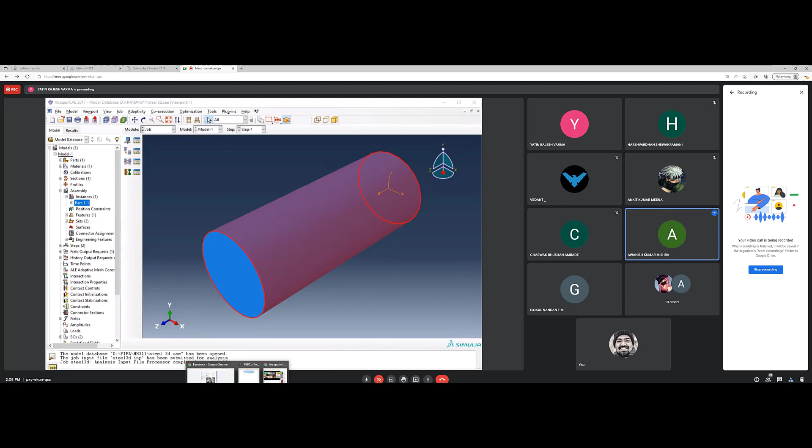यतिन, आई कैनॉट हियर यू. कैन अदर्स हियर हिम? Avnish, are you able to hear Yatin? मुझे अवनीश भी सुनाई नहीं पड़ रहा. So you guys can hear me? I cannot hear you guys. अच्छा, just हाँ, अभी बोलो. अभी आ रही है आवाज़, ठीक है. सो हाँ, मॉनिटर कर लो.

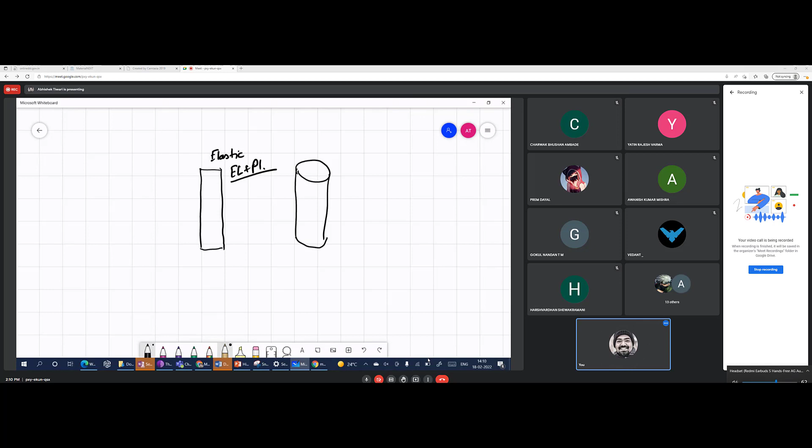But in none of those cases you should have seen that the sample is necking. The sample is not necking, right? It is just getting elongated. In the elastic case, there is a Poisson's ratio. In plastic case, the Poisson's ratio is 0.5, volume is constant. And apart from that, nothing else happens, right? So the question is how can we also simulate the necking part, and why is necking not coming up? Can you tell me why the sample is not necking in our model?

Hello? सुनाई दे रहा है क्वेश्चन? The question is that whatever you have modeled so far, the sample was not necking. Is this correct? तो क्या मिस हो गया जिसकी वजह से नेकिंग नहीं हो पा रहा है?

So if you give values beyond UTS, do you think there will be necking?

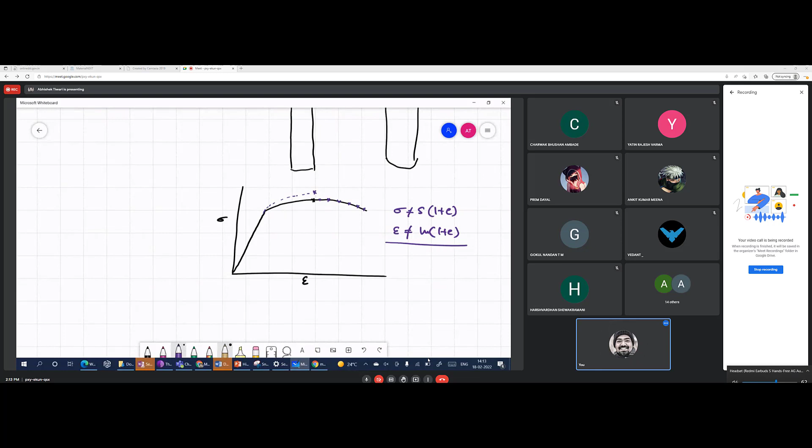And even if you go beyond UTS, first of all, you cannot get points from here. For true stress strain values, you can't use that relationship, right? So sigma is not equal to S into 1 plus E, and strain is not equal to ln of 1 plus E. This will not hold beyond UTS because the volume is not constant. So I hope this part is clear to you guys. So this relationship of true stress strain versus engineering stress strain assumes that the volume is constant. That's how you derive these equations.

Because the volume is not constant beyond this point, you cannot use this correlation, so you can't get the values here. One point you can get, which is at the last point, and that you get from the experiment. Basically your sample breaks into two pieces, so at the end you join those two pieces and measure the final area, then calculate ln A naught by AF, and you get one particular value of true strain there.

Some people apply this formula for the stress value and take that as the last point, so they get only one point, and then they extrapolate the data like this. The point I'm trying to make is that even beyond UTS, this true stress-strain curve is not supposed to go down. It will always go up, right? And as long as it goes up, there is no reason for softening in the sample.

For the model, right, whatever is happening here, a similar kind of thing will keep on happening even beyond UTS, even if you supply the data to the model. So even in that case, there will be no necking. So what we will have to do in order to ensure that the sample also simulates the necking of the experiment.

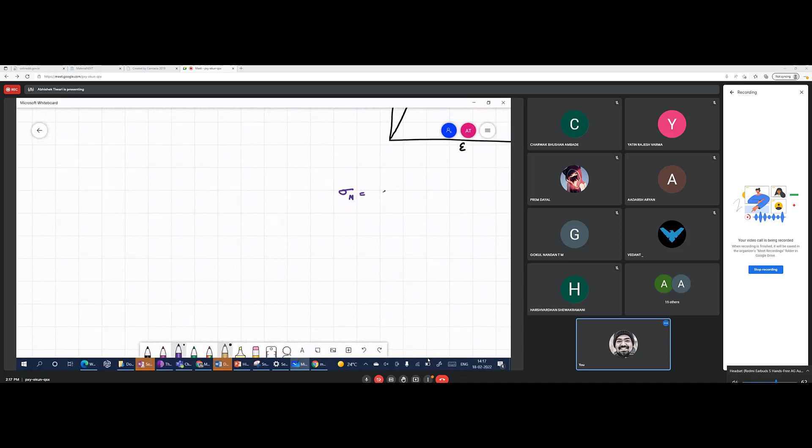Stress at any sharp stress-raising place is equal to stress applied into 1 plus 2a by b, where a and b are the major and minor axes. So in this case, it is an assumed ellipsoid, which is either a notch or a crack.

So here you don't have a stress concentration factor. So why will the stress increase at any place locally? Unless there is a local deformation, necking is not going to happen.

Okay. So anyways, maybe you need to revisit the MM302 discussion. So what happens is that...

Okay Vedant, you have said too many words, and in technical language those words have certain meanings. Can you tell me what is pressure? No, that is stress. Hardness also has the same dimension, load per unit area, but hardness is not stress. So pressure is one component of stress, which is hydrostatic stress, right?

Okay, so that is negative hydrostatic stress. Okay, so the material will flow. Okay, you have made a right point. This is the cylindrical parallel part of the tensile specimen, and when you apply forces so that you are pulling it, the material is flowing, and for a certain period of time it will flow in a uniform fashion, because there is no reason to not flow uniformly unless you have something which is inhomogeneous inside.

So it will elongate following the Poisson's ratio or constant volume condition, right? But it cannot do that forever. So at some point it will become very, very thin, right? And when it becomes very thin, there will be a local anomaly at some point. It can be at the center; it usually is the center for ideal condition because of the constraint. So where the constraint is maximum, the constraint is maximum at the center, right? Because you are pulling from upside and downside, so where the forces balance each other, they balance at the center, right?

And that's why you have to have the anomaly there. So there will be a breaking point where the continuum cannot sustain any holes. At some point of time, the continuum will break. Okay, so there will be a surface creation. Once there is a surface creation, what happens? The stress will change and the strain will change locally. So then you will have those stress concentration factor and all those things.

But that is a very ideal situation. Usually what happens is that if the material is flowing like a ductile material, then you will have some void formation. Okay, so these voids are the points of breaking of continuum. What is a void? Void is something where you don't have a material, right? So continuum is not there.

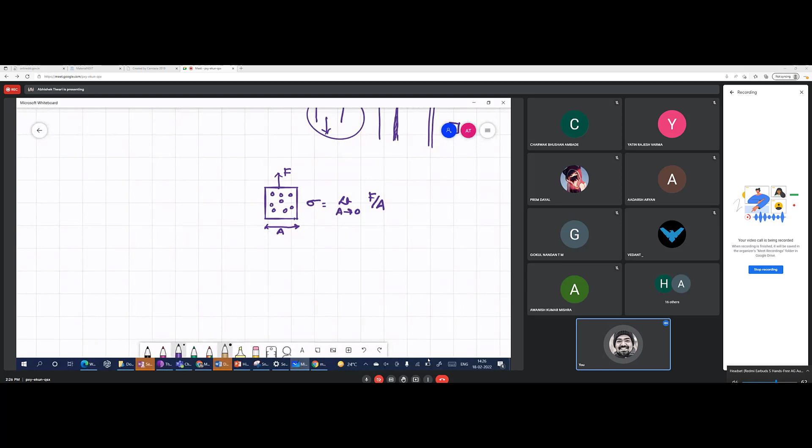One simple idea is that you assume a box, okay, in 2 dimensions, and you are applying certain amount of force, and this has an area, so you have stress is equal to force per unit area. So stress is equal to force per unit area, and so everything is good. What will happen if there are voids in the system? So let us say there are certain number of voids in the system, and they can be of different sizes, they can be of different shapes, we are not bothered about it.

So in that case, if I cut it at one place and then I try to find out what is the stress there on this plane, okay, on the xx dash plane, then that will be force divided by the area of xx dash plane, right? And you can see that this area is not equal to this area, right? Because if we look at this plane closely, then we will be cutting certain number of voids, right?

So the total area A is this, but the real area should only include these parts, right? So this is A dash and this is A. So obviously these two are not the same. Is it making any sense to you?

Okay. So now, as a way of defining this difference in area, I will call that a parameter D, or let us say omega, okay? And I can say that obviously A dash will be a little bit smaller than the initial area by a factor omega. So when omega is 0, A dash xx is equal to A, and whenever omega has a value higher than 0, this will not be true; it will be equal to A into 1 minus omega.

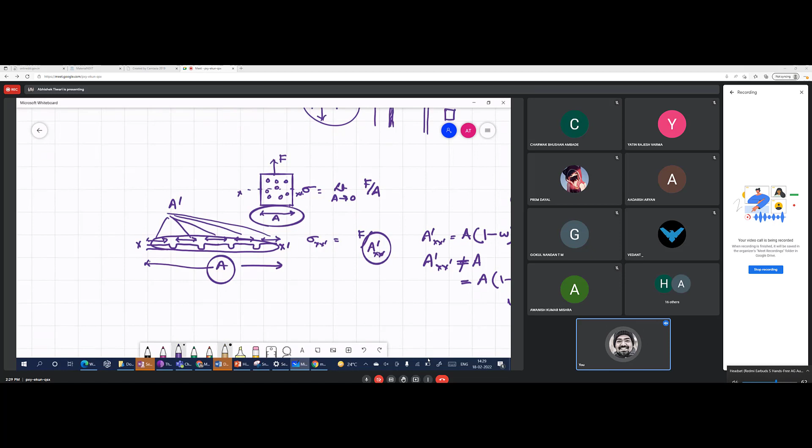And then to what maximum value can it go? Obviously it can go to a value of 1, where the area will become 0. So when omega is equal to 1, A dash xx will be equal to 0, right? But we cannot ever reach that extent. Why? Because before we reach a place where all of the surface is consumed by voids, the material will fail much before that. Do you understand this?

So you have an area where certain voids are there, right? And then with more stress, the number of voids or the size of voids or both will be increasing, right? So as the force increases, the A dash will keep on decreasing because you have more voids and bigger voids, right?

But you cannot go to a point where the whole area is consumed by the grown-up void, or crack if you call it. It will not go to that point because the material will fail much before this condition. Okay. So is it making any sense to you?

Okay, so what we have established is that we have a parameter omega which starts from 0, and ideally it can go to a maximum value of 1; it cannot go beyond 1, right? But in reality it will hardly reach the value of 1. And this defines how much difference in stress I am getting. So there is a change in area and therefore a change in stress, right?

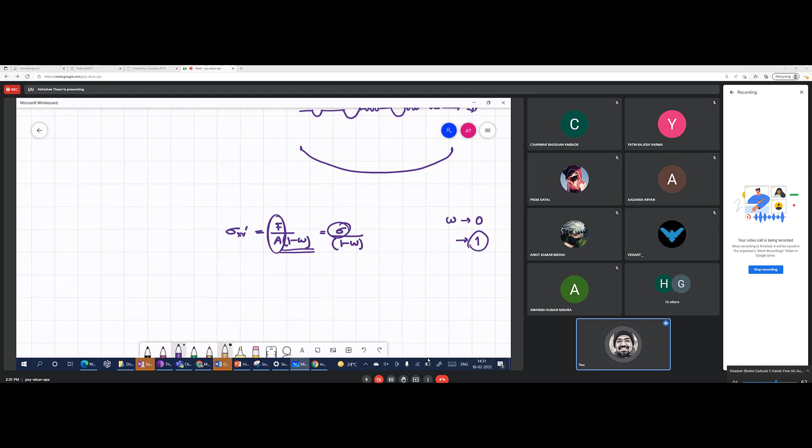So the real stress when there is void formation will be equal to force divided by A dash, which is A into 1 minus omega. And F by A is simply the stress on the continuum material part. So F by A is sigma, and then you have this factor. So because of voids, you have a certain applied stress, but locally the stress is increasing because of this factor. Is this making any sense to you?

Yes. So we have defined a parameter which incorporates the effect of voids, right? But we are not actually going to simulate voids. We are just going to tell the element the conditions of this parameter omega, that at this point omega begins and acquires a value higher than 0.

So on the stress-strain diagram, the material goes like this until UTS, or we can start at any other point, but we have to be in the plastic region. Let us say before this point the value of omega is 0, so everything goes fine. As soon as you cross this point, omega starts, and then the calculation of local stress based on the value of omega starts accumulating in the element.

And then in each calculation, the next time you will strain a little bit more, right? So if you are here at point A, let me make it a little bigger. It can be UTS, it can be a little before UTS, it can be yield strength. It depends what kind of material you are trying to simulate.

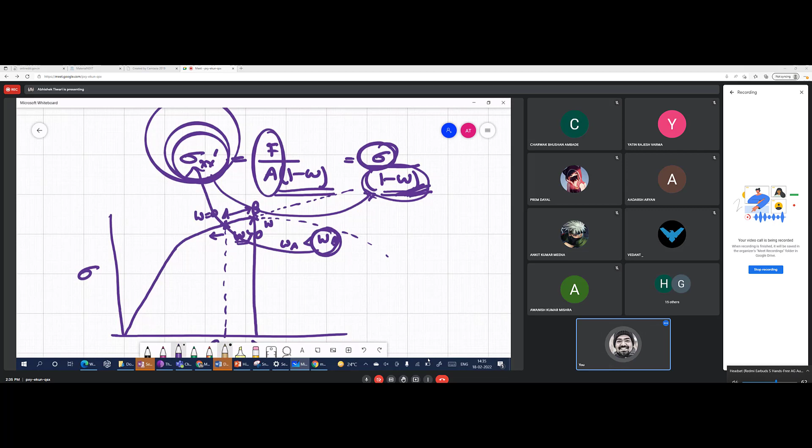Why? Because omega is increasing. So the same reason for both of them. So the engineering stress strain diagram will be going down, but the true stress strain diagram will keep going up, because the stress is increasing without doing anything. This stress is increasing not because of strain hardening, not because of some real hardening in the material. It is increasing because of the decrement in the area, the decrement in the load bearing capacity of the material. It actually is a volumetric phenomenon, but we are simplifying this by looking at the area. The void is, I mean, everything is in 3 dimensions.

Okay, so using this simple idea, we can tell the model to apply this factor in its calculation. And for that we have to tell it the initiation point. So as soon as in one element your strain value reaches a certain critical value epsilon c, as soon as it is greater than or equal to epsilon c, omega is greater than or equal to 0, right? So whenever it is a little bit greater than epsilon c, omega will be greater than 0.

And depending upon how much strain you have, omega will acquire a certain value and keep on increasing, and at a certain point omega will reach its own critical value, when you say that this element is now broken and remove it from the system. As I said, omega ideally should reach a value of 1 when the area becomes 0, but it will not go there. So omega will reach a critical value. When that happens, you say that this material is no longer good to hold any load.

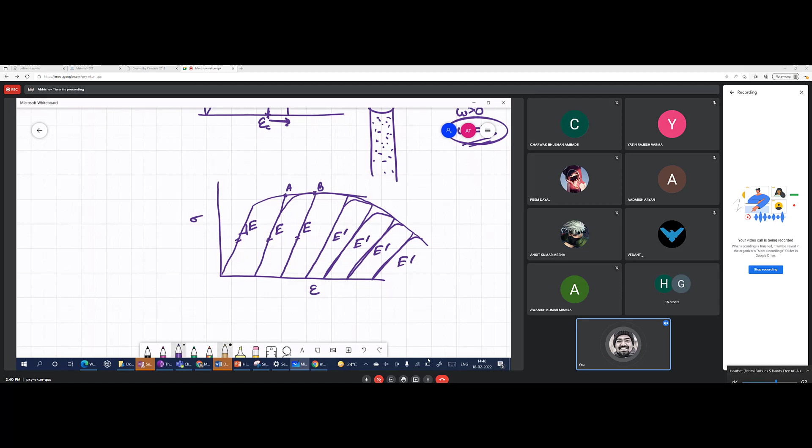Okay? And this change, so this E dash is smaller than E. So E dash will be equal to the real elastic modulus into that factor of damage. So this omega, yeah, the factor will remain the same. Okay. So this omega is called the damage parameter. Nothing fancy about it, because it is describing damage.

And then damage starts, so that is called damage initiation. It starts at a certain point. Okay, it starts when the strain... So we can put different criteria for different types of material, but basically if you imagine the small pieces of this sample to be smaller tensile samples, then you can hypothetically say that each small tensile sample has its own failure strain, okay, has its own UTS.

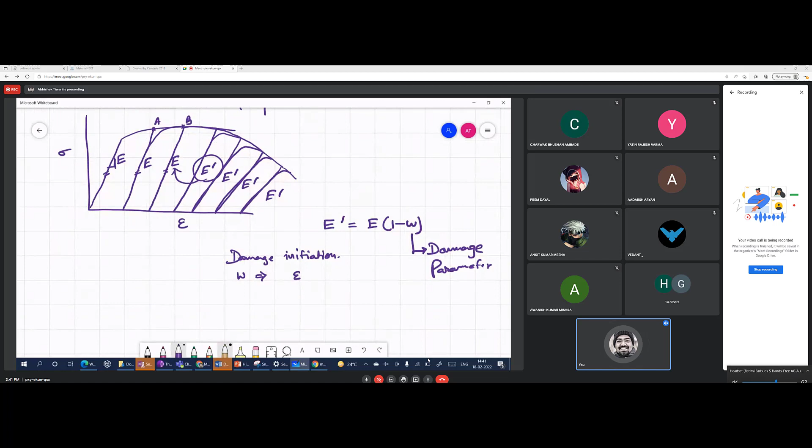So after UTS, you can imagine that those smaller hypothetical samples are softening, or they begin to soften, or they begin to neck. So you can say that the damage starts when the strain value is some value, let us say 0.2. Okay, and then after that omega has to follow a certain rule, so omega also keeps on increasing with the value of strain, right?

So as the strain increases, omega increases, but is it increasing linearly, or is it increasing following a certain polynomial function? So what is that function? What describes the relation of omega with the strain or with the stress or with any other parameter? So that is called damage evolution. Okay. So damage evolution basically will describe how omega is a function of strain or strain rate or stress, temperature, constraint, etc.

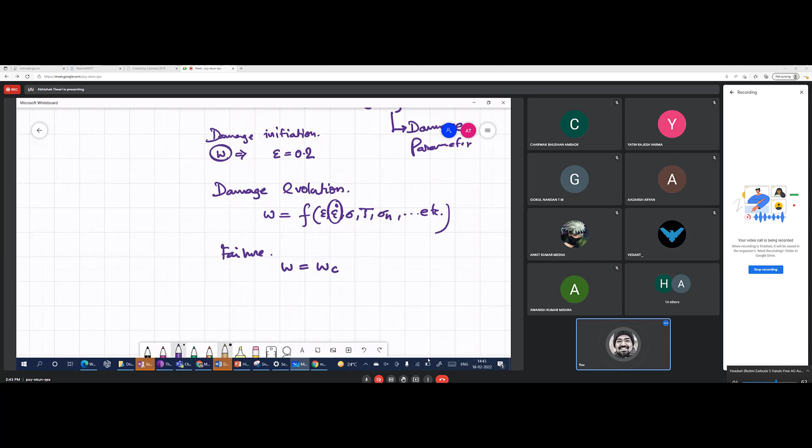Strain rate I have already given. Okay. So it can be a function of all those parameters, and that function will define how omega increases. So you have damage initiation, damage evolution, and then you have failure. The failure criterion will be when omega reaches omega critical, we define that the element has broken, gone, remove it out of the system. Okay, and this is how we tell the model to do this.

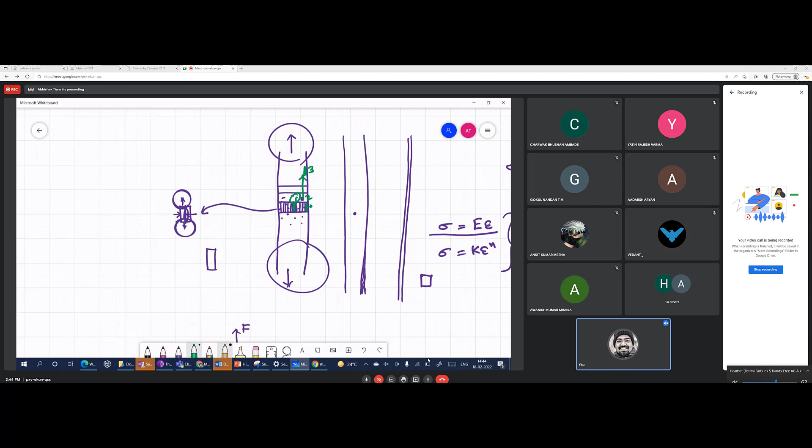Usually it has been found from experiments and a lot of study that this damage parameter is usually a function of strain rate, and it is a function of constraint. Meaning what? That in this tensile sample, if these hypothetical small babies fall in the middle somewhere, here, or at the surface, or here, they will not follow the same criteria of damage initiation and damage evolution, because the amount of constraint on 1, 2 and 3 is not the same. 1 is facing side constraints from both sides, 2 is not facing it from one side, and 3 is at a place where the constraint is a little different from the center, right?

So these are also related to the damage parameter, and therefore usually it is a function of strain rate and the amount of constraint. And then you also have to tell it to do all this calculation before you reach the failure strain, obviously, right? When you reach the failure strain, there cannot be any damage evolution, it will just break. So the failure strain is related to the critical value omega c, right? So far are you good? Do you understand what I'm saying?

Okay. So we will do this and we will see if our sample necks. If it necks, then our next task will be to take an experimental stress strain curve from any article available on the internet and then simulate that using this damage formulation and see if we can get that stress strain behavior with our own model. So we have to somehow hit the right damage parameter so that we can simulate the damage.

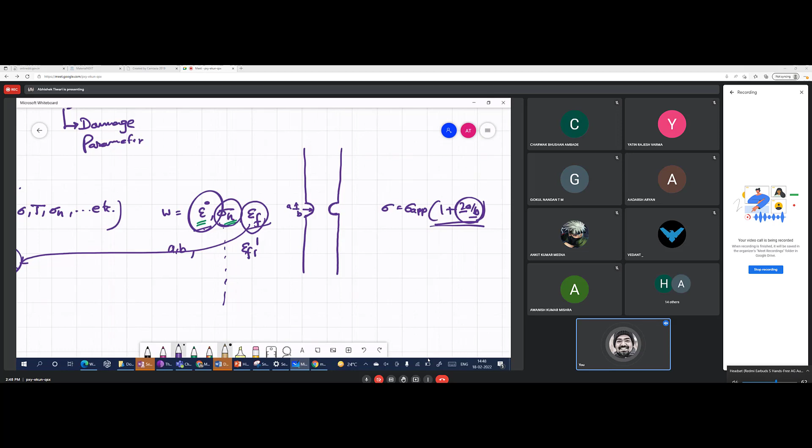So you fix the strain rate also, okay, and then you find out at what strain the sample fails. So you get the point like failure strain for a sample which was tested for some A and B value, and it was tested at a certain strain rate, and then you conduct 5 to 6 tests there and you keep on changing A and B, keep this constant for 5 samples or 3 samples. So if you test more, you get more data points, right? EF2, EF3, EF4 and so on.

So this is how you get the experimental results, and from that you establish a formula and then you feed it to the model so that your simulation is more realistic. But you can imagine that in order to simulate one tensile test, you have to do so many tensile tests. Okay, but the labor is not bad, because once you establish this formulation, then for this grade of material you will never have to do these kind of tests again.

So if you want to find out component failure, or something else, then you don't need to really do the testing again and find out how the damage happens. You can simply feed that formula and use it, as long as the material grade and heat treatment and all those things are unaltered. So grain size and other things. Also rolling, so there should not be any preferred orientation, which is in a way related to grain size. Okay, so this is what we are going to do.

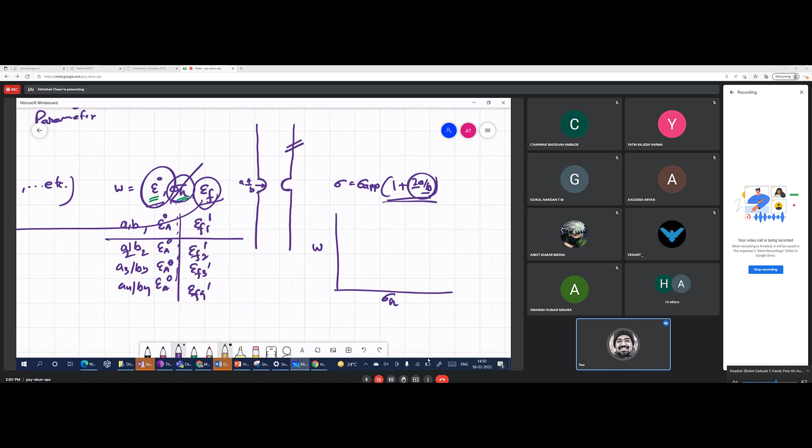And to make it simple, let us assume that our damage evolution criteria will not be a function of constraint, which is a very bad assumption, but let us make that assumption. So if we plot the damage parameter versus constraint, and that is independent of constraint, then it will be a constant line, right? So for any value of constraint, it will always have the same value. So this is what we have to put, and we will also assume that it's not a function of strain rate. So we will give some value of strain rate, and we will just see for our modeling and simulation lab experiment how it goes.

Okay, so now let us come back to Abaqus and let us try to model the thing in 3D, and there we will also see boundary condition, and what other thing was there? Partitioning.

Oh, I am not sharing. Am I sharing the screen? So let me share the screen and let me go. Where did I make the work directory? I believe here, session 3. So let us make damage. What am I doing? Oh, I have to first save this now. No. Yeah, go on. Take it. Done?

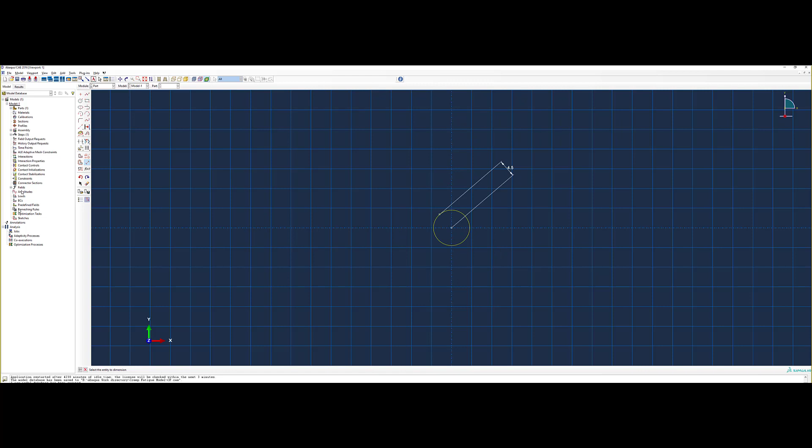And we have to extrude it with 22.5, then also the cylinder will be made. So you can make it in both ways.

And what if I take... so revolution, you know now what it is. In revolution, if I make a circle like this, and fix the diameter by whatever value it has, and then revolve it by let us say 3600 degrees, that means 10 revolutions, and then I include a pitch of distance per revolution of let's say 2, then it will make a spring of this kind. So this is what revolution is. It's overlapping because our diameter was 4.5 or something, so pitch should have been much higher.

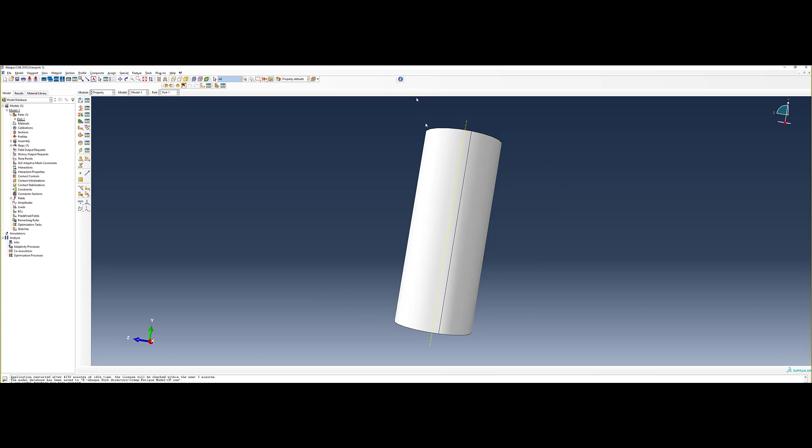So we don't need these two things. So we have this tensile sample ready, and now we have to make property. Actually you can make either half of this tensile sample, or I can still cut it in 1/4 and model that because it is symmetric that way also.

So what I mean to say is, instead of making the whole circle, I just have to make 1/4 of that circle. So this was 4.5, and then I will cut it. And I just need this 22.5, and this is what I can model, okay, because this is also symmetric. So this is actually 1/8 of the total sample.

Yes, Satya Prakash, you have raised your hand. Satya Prakash.

Oh, no issues. Okay, so now we have made the part. We go to property and we have to make that material thing, and here we have to give those properties of damage also, which we will do. So what was our Young's modulus in our last simulation?

That is the definition of triaxiality for this case. If you are not sure about something, if you think, oh my god, what are these parameters and how should I fill it, then you simply go to the internet, and our friend Mr. Google should help us. So google.com, and then you go and just write ductile damage abaqus manual.

So the window that pops up for this, we have to come back for it. How much was 1920? Okay, no, keep changes. Done. What is the screen size here? You can't see the screen size. Anyways.

What were we doing? Yes, Google. So all these are abaqus manual. You usually have a manual when you have the software also. So damage evolution, you can go there. Defining damage and failure for ductile metals. Let us go and see.

So here this is the abaqus manual, and we are in damage and failure for ductile metals. This is talking about ductile damage initiation, evolution, and all those things. And you see this formula where omega, can you see this formula? Sigma is equal to 1 minus d sigma bar. Can you see this? Yeah, so this is how they also use the same formulation.

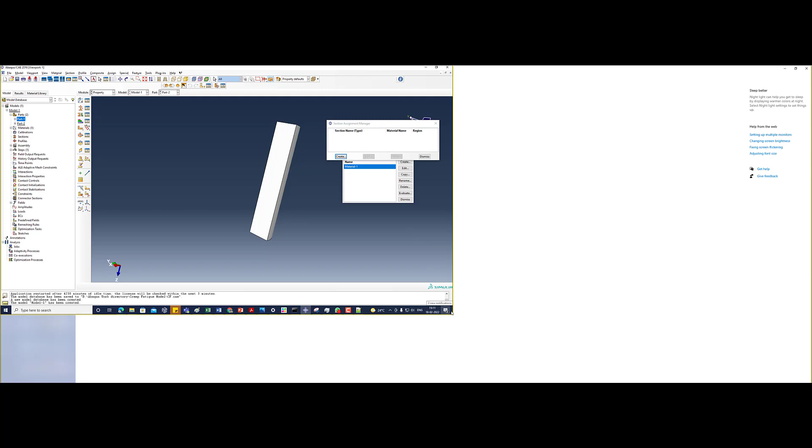I'll take this. Done. Oh, some window is popping up which I cannot see. I have to change the resolution back again.

So create section, this part you already know, so let me just do it. To create a section: homogeneous, solid, continue. There is no need for plane stress or plane strain thickness because we are defining all the dimensions in 3D. Okay, it became green, so material has been successfully assigned.

Am I sharing the screen? Yeah, okay, so material is defined, described. Now what do I have to do? I have to bring it into assembly.

So I click this. I have two parts, I have made two parts. I have to check which one I have actually assigned the material to, part 1. So part 2, there is no need.

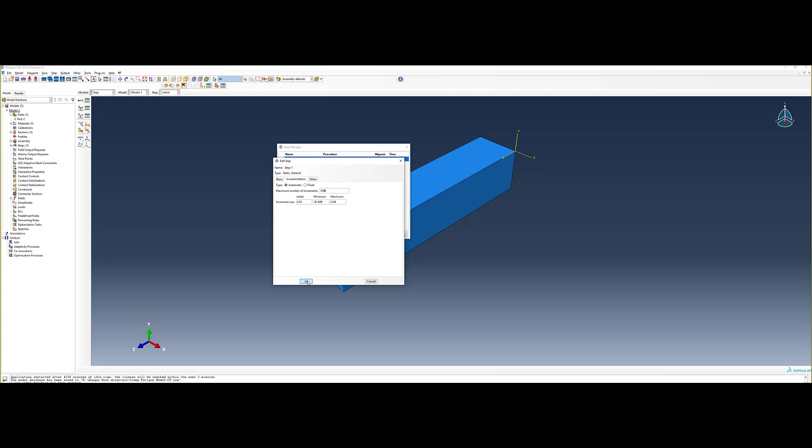Done, step is created. Now go to interaction. We don't have to do anything in the interaction module. We now have to provide the boundary condition.

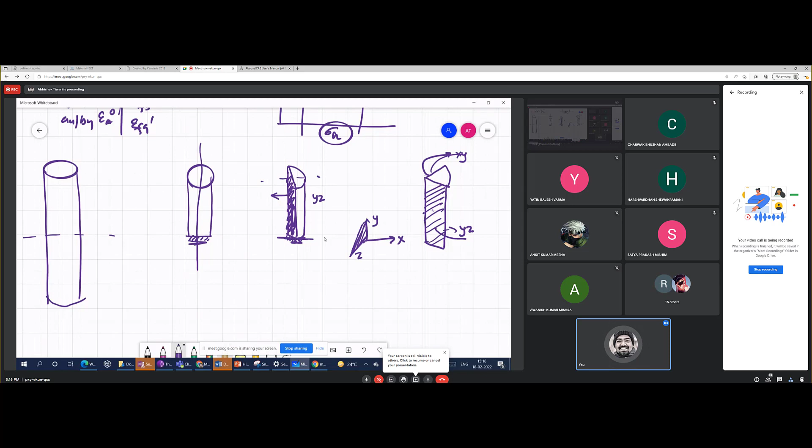Okay, so we have to apply that kind of symmetry. We have to apply YZ symmetry there, XY symmetry there, and then on this plane we have to apply symmetry so that the other half downward sample, this part is taken care of, and that is what we have to do. Okay, so let us go back to the model.

Okay, so we have to go to boundary condition, create boundary condition. So the first boundary condition is going to be symmetry, continue.

Can you see the cursor? Can you see my cursor? Okay, so on this plane something is there on the other side also, right?

So in which direction is it?

It is in the X direction, so we have to supply symmetry. Take this plane, done, this is symmetric on X axis, so apply X symmetry. Then create symmetry, take this plane, symmetric on Y axis, so Y symmetry. Then create symmetry again, take this plane which is symmetric on Z axis. So symmetry, symmetry, symmetry, done.

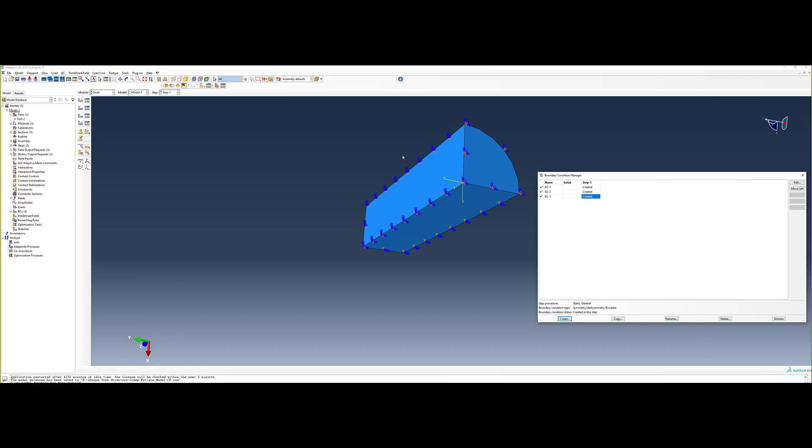Now we have to apply load also. So did we apply load or displacement? I think we applied displacement. No, boundary condition of 2 millimeters. This side is symmetric, so on that side we have to apply the displacement.

So we go to displacement, rotation, and take this plane, done. It will go 2 millimeters up in the Z axis, nothing else will move, but rotation may happen. So U1 U2 should not be given, so U1 U2 is 0, U3 is 2. Okay, so this is what it looks like.

Okay, so our boundary conditions are done. Now we have to go to mesh, and when it looks green in Abaqus, by default it is structured. The algorithm is structured, that means...

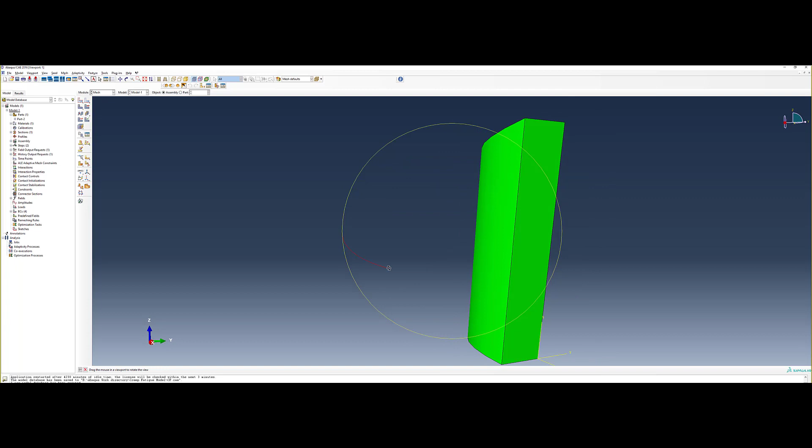Why is it showing like this? Yes. So okay, so we go to...

Mesh type, and here we have to apply 3D stress. That is okay, standard is okay. So that means implicit algorithm, shape function is linear. So this is a brick element, 8 noded brick element with reduced integration, hourglass control, and so on.

One thing you have to ensure is that element deletion is on. So for element deletion you have to click yes, and maximum degradation is the value of omega. Omega cannot go to 100%. So if you say that at 90% of omega the element should be considered as failed, you just write 0.9 here. So instead of 1 it will go to 0.9, and this is the element type.

I will draw this element on the whiteboard and tell you how it looks like. So, done.

Okay, and then I have to change the resolution so that we can look at partitioning, because before meshing we have to do some partitioning there.

R means reduced integration. Reduced integration is simply a numerical integration procedure which we will learn in our theory class. In that process, what happens is the dimensions of numerical integration, the number of points, changes. So numerical integration is not this kind of integration. Numerical integration means adding up small pieces. So an ideal mathematical integration, when that is converted to a numerical integration.

So what is numerical integration? Let us say you want to integrate dx from 0 to x. This is a simple analytical formulation, so there is no issue there. Numerical integration means that you plot x like this, I mean f of x, so f of x dx.

And what you do is you take small dx's and add all those. That is basically what integration is, right? So instead of doing analytical integration, numerical integration just adds the small pieces. But the problem is that you don't have all the pieces, so you have to make certain assumptions, take a good amount of pieces, add them, and then give the value. So it will never be exactly equal to analytical, but it will approximate.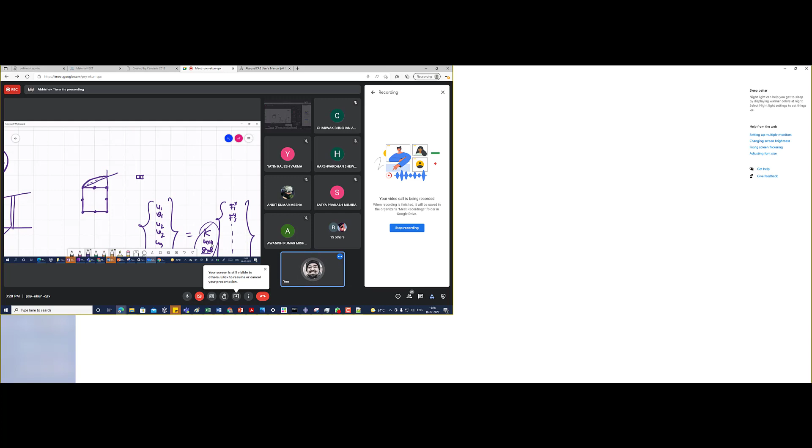Increase both, but then it will become very very heavy. So if you can afford to do that, why not? But if you cannot afford to do that, then you have to be happy with whatever more or less good results you are getting. Okay, are you getting my point? So what you are saying is right. You do the full integration. Full integration, good. Can you do it? If not, then reduce it and deal with the error.

The Simpson's rule, trapezoidal rule of integration, there also if you create more number of points, then you get a better result, right? But if you can do that computationally, then good. If you can't do it, then you have to be happy with less number of points, right?

So this was the element which I wanted to tell, and then I wanted to tell why we are going to partition. So this is our watermelon shaped tensile sample, and at the center you have damage. So where will the damage start? Damage will start usually at the center and then it will grow towards the side, if you want to calculate constraint and all those things.

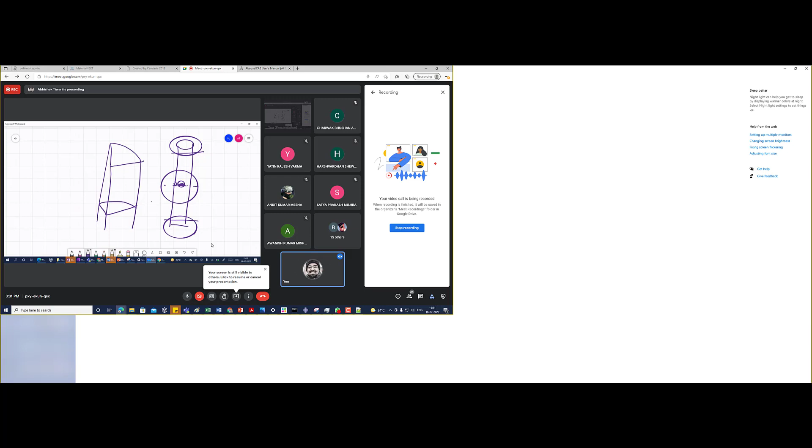And for that I will create a small partition, and in this part I will make smaller mesh, and in the above part I will gradually transition to a bigger element size. Is this understood? Okay, so let us go to our model. Okay, so are you now looking at the screen of model?

Okay, so we can do partition in the part module or in the assembly module. At any place we can do. And your question was how to do the partitioning in 3D, because there we used to do it by face. Here, instead of face we have a volume. So the simple thing is that you partition a face, then extrude it through a volume.

How did we make the 3D thing? We make the 3D thing by making something in 2 dimensions and extruding it or revolving it. So similar thing we will do in partitioning also. We will cut one face, extrude it towards one edge, and we will do the partitioning. Okay, so where you see this datum coordinate, there we have defined the symmetry. So that is our center part, this is our edge part. So I have to make a partition closer to that center part.

So I click on this one. So this is partition face sketch, this is partition cell. Before partitioning the cell, I will have to partition a face. Okay, so if I click on partition cell, then you have these options: point and normal, 3 points, and normal to the edge. Okay, so I will come back to this, but before that let me partition a face. So I'll partition this face.

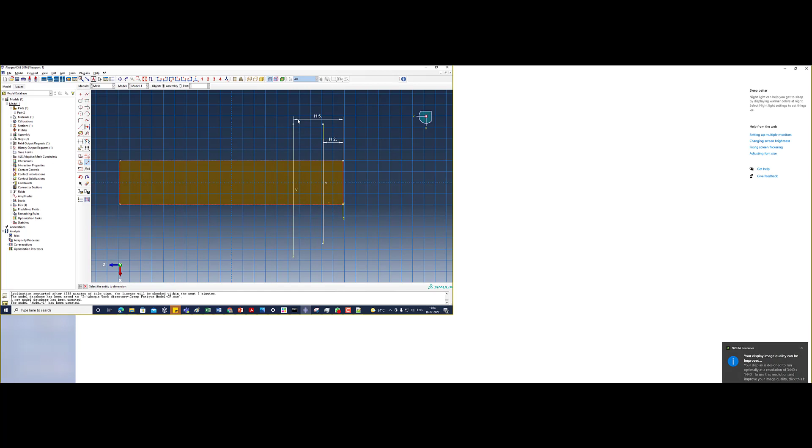So it is 22.5 altogether. So I'll make a partition at 5. I can make more partitions also. I can make it a little complicated also. So let me make 2 partitions. So one partition is from the center, 5 millimeters away. So this is 3, I'll make it 5. 5 is too much, so I'll make it 2 millimeters. Apply, and the other one I want to make at 5 millimeters. So this is 5. Okay, so done, and you see a partition has been made.

Now I will create a cell partition by extruding something which I have created in 2 dimensions, which is my face partitioning. So I will extrude this thing. Okay, so I click on this option, extrude/sweep edges, select one or more edges. So I'll select this one. I want to extrude along which direction? Along an edge direction. Extrude along direction means XYZ, or along edge means you take an object on the part which I have made. So I'll take this edge and I want this line to be extruded along this edge, if you can see this arrow, and then create partition, and that partitioning has been done. If you see, this part has been partitioned.

So similarly I will do this one. So extrude, sweep edges. So now instead of one cell, that means 3-dimensional volume, I have 2 cells. I'll select this one which I want to partition, and I'll select this edge, and I will partition this along this edge. Previously I selected that edge because that was a part of the cell, because there was only one cell. Now I am partitioning this cell, so I cannot take that edge because that is not a part of this cell. So I have to take this edge which is parallel to the previous one. So create partition, this is done.

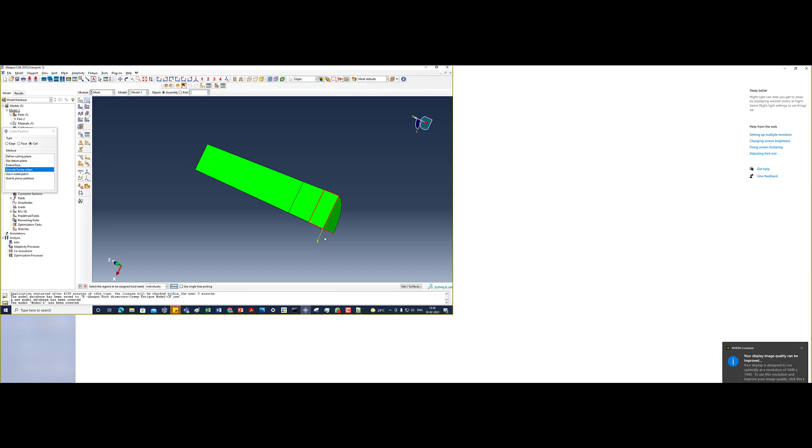So local seeding, and I want to keep it regular, so I will take this edge, this edge, this edge, that edge, this edge, and one more, this, everything, and I will say by size 0.1. Okay, so you see this is how it is going to be. I can select this one also, this one and this one, done, 0.1, apply, okay.

And I can also mesh it region wise. So instead of clicking on this button like this, you just click and don't leave your mouse, then you see 4 other options coming, and there you have this one which is mesh region. So you can select a small region to be meshed, but before that I want to see if I have described the type of element. So I want hexahedral elements. Hexahedral is that brick type of element.

Oh, did I draw that element? Oh, I didn't draw it. No? So let us come back to whiteboard. Are you guys there?

Okay, so if you look at the whiteboard, then the C3D8R element, R is just reduced integration, so it's basically C3D8. So in 2 dimensions you have, this is your rectangular element, right? And the same thing becomes like this. It's a cuboid basically. So this is what the C3D8R element is. So you have a 3-dimensional element, that's why you have C3, then you have node number 1, node number 2, node number 3, node number 4, 5, 6, 7 and 8.

So it's like a unit cell, but depending upon sizes, instead of a cuboid, it can be a parallelepiped, which is called a hexahedron. So this is that element. And the shape functions are being linearly interpolated from one node to another. So if you want to create a parabolic shape function or higher order shape function, that would mean creating a middle node on each of the edges, right? So that is called C3D20R if it is reduced integration. So instead of 8 nodes, there will be 20 nodes.

So now you can imagine that instead of 8 cross 8 of a stiffness matrix for one element, not for the whole model, you will be having a 20 cross 20 matrix. And then at the end you will have to assemble all these elements in one matrix. So if you have 20,000 nodes, the global stiffness matrix will be of the order of 20,000 cross 20,000. So come back to model.

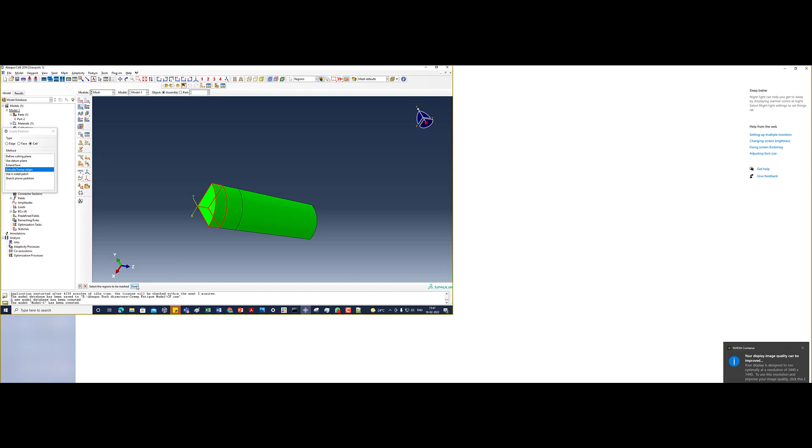So here I want structured, meaning all the mesh should have a good continuity, so there should not be a big element next to a very small element. So structured and hexahedral. I don't want tetrahedrons, and hex dominated means you will have some hexahedrons and some tetrahedrons, and wedge is a wedge shaped element. Okay, so I want this. So that is done, and then I will just mesh this part because I have assigned local seeding there, so it looks like this, very fine. And you see 39,400 elements have been created.

In each element you have 3 degrees of freedom at each node, right? So if it is 40,000 elements only in this part, you will have 1,20,000 nodes approximately, and into 3 will be the degrees of freedom, because at each node you have displacement in 3 directions, u1, u2, u3. So 1,20,000 into 3, 3,60,000 degrees of freedom. So your global stiffness matrix for just this part will be 3,60,000 cross 3,60,000. So this is how exponentially the size of the problem increases by decreasing the mesh size, and this is why people increase the mesh size.

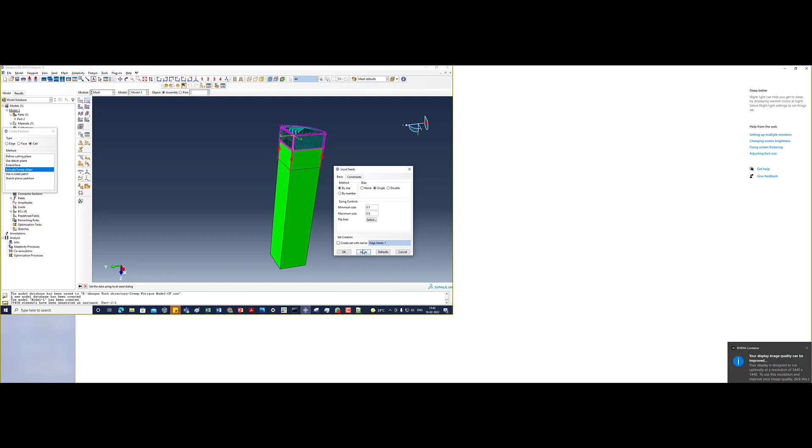So now I want the element size to gradually increase as we go away from the center. So I have taken these 3 edges and I say done, and I want a biasing, meaning from the center towards the edge the size should increase. By default the arrow shows the direction in which the smallest size element should be. So I will just flip all 3, and the maximum size I want is like 0.5, and the minimum we will go to 0.1 because 0.1 is the size there. Apply. So this is how the seeding looks.

And then let us mesh this part also, and there is some weirdness somewhere, probably because we have assigned there, we have assigned there, and we have assigned here also, but it has to keep 0.1 there, so it can keep 0.1 there. Why is this not so regular here?

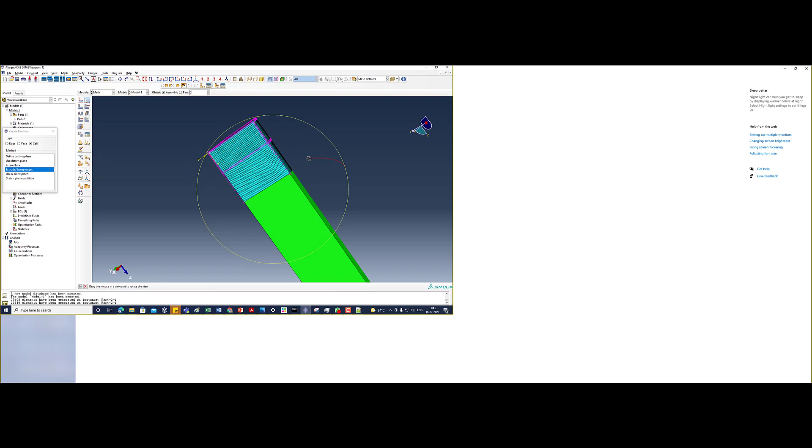I do not know. Okay, but the element size is increasing. Okay, I think if I, what did I do? So done, and this is okay, this is okay, and meshing part was, so I take this, done. Oh, okay, fine. Okay, now I want the size to even increase to a larger extent at the end.

So done, and now I want to increase it to 2.5, let us say, and the minimum should be 0.5, because we ended at 0.5 there. So apply. Okay, mesh this region. Yeah, so it will change a little bit to maintain, which is not good. This is not good. If we mesh the whole thing together, nothing changes. So our meshing is not very good.

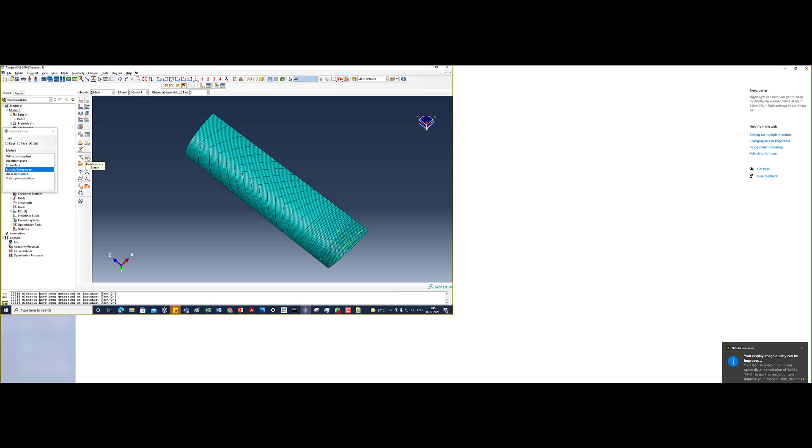We may need to create a partition here also in order to make it good, because at the center it is somehow weird. So if I want to extrude this line, along which axis? Okay, so let me partition this face and take this one and partition it like this. Done. And then let it go through. So done.

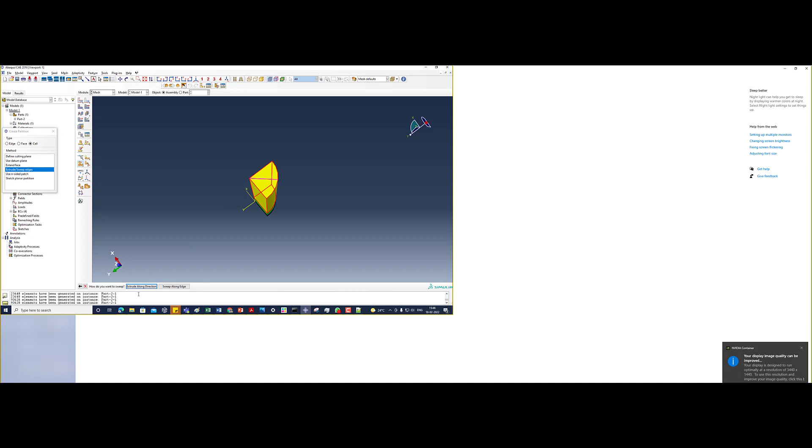Okay. This one is also not partitioned, no? So let it be like that. How are our elements defined? But here not. So done. Flip it. 2.5, 2.5. Mesh. What happened? Oh, this became further weird. Why?

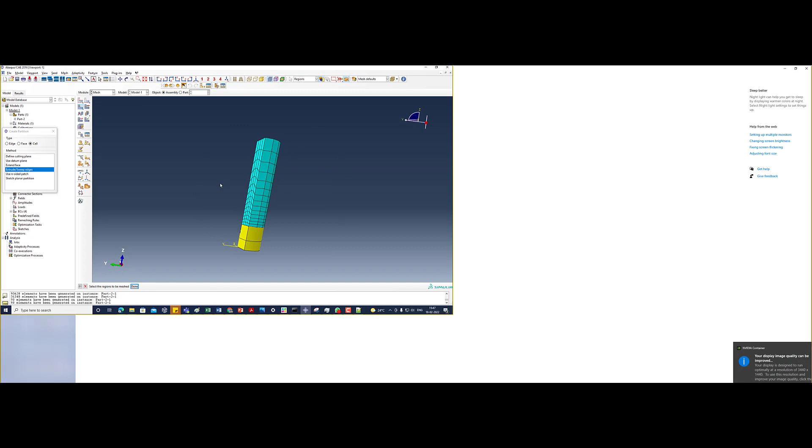So if I begin meshing with this, what happens? Huh? Oh, so one cell. So here it is keeping it good, but there is a curvature in the middle. Why there is a curvature? Because of the curvature. Why there is a curvature, I don't know. Yeah, but on the curved side, it is like this, no? And then at the center, why it goes like that?

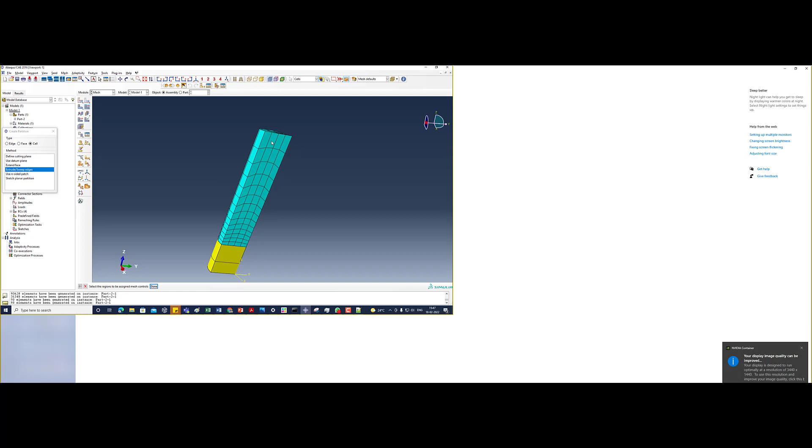Yeah, could be. Could be. So if we make it sweep, as medial axis, minimize the mesh transition. Okay, mesh. Now it is okay. So our algorithm was not correct. Now it is okay. So these two also will. No.

So I have to go there and make it sweep, medial axis, minimum transition. This one we already have, right? No? Yeah. Okay. And mesh it. Then mesh this one. This will make it. Yeah, it is good, not bad. It is more regular than last time. We're creating too many elements, so now it looks good. It is not looking that bad.

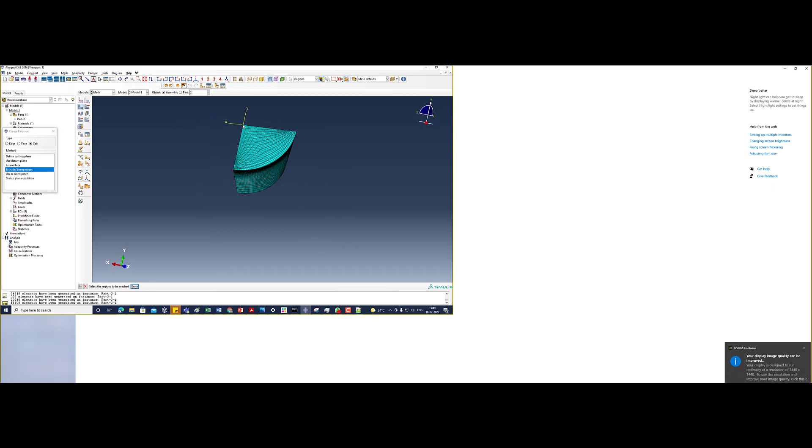To make it good here, I'll have to partition it further. But let us go ahead with this. Okay, so meshing is done. Now we'll go to job. I hope I have done everything. So let me see. Field output request, pre-selected default is there. Okay, so good to go.

We go to job, set work directory. Oh, okay. So resolution issue. So it is there in the work directory. Now we create a job, 3D. I don't think it can start with a number, but I am not so sure. So 3D_damage1. So let me give it 40%, I think because we have too many elements there, it might be consuming a lot of memory.

So we have 15,800 plus 20,540 plus 336, 35,000, 36,000, 340, 36,640. So approximately 36,000 elements we have, which is not much. 36,000 is okay. So we are getting some warnings. Let me change the resolution again. So what warnings are we getting? 4,007 are distorted, either blah blah blah. Okay, so some of the elements are not good because of meshing, but that is okay.

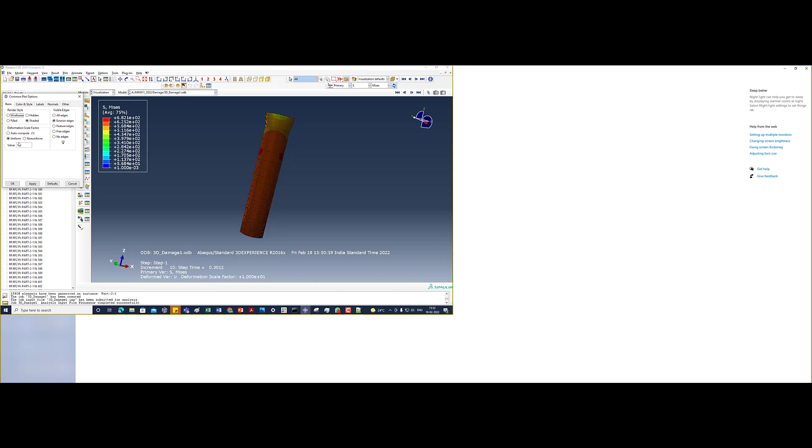And this is like something, but this is because our factor is too high. So it looks like this, and you see the stresses are higher, so it is not uniform. The stresses, the elongation will be uniform for some time, and then I hope it will start necking.

So if we go to, oh, that is what I missed. Right, so in the field variable we should have selected the damage parameter. So I'll have to kill this. Kill, yes. Go to field output, and here in field output we have to select some parameters. So for that you need to go to porous media. Porous media, because we are talking about voids. So we go to void volume fraction.

Void volume fraction due to growth, nucleation, and then we have to take state where we need to select the status, which will define if the element is broken or deleted or not. So if it is 1, element is gone, 0, element is there. Okay. So these are the things which we have to include in our field variable, and then we can submit the job again.

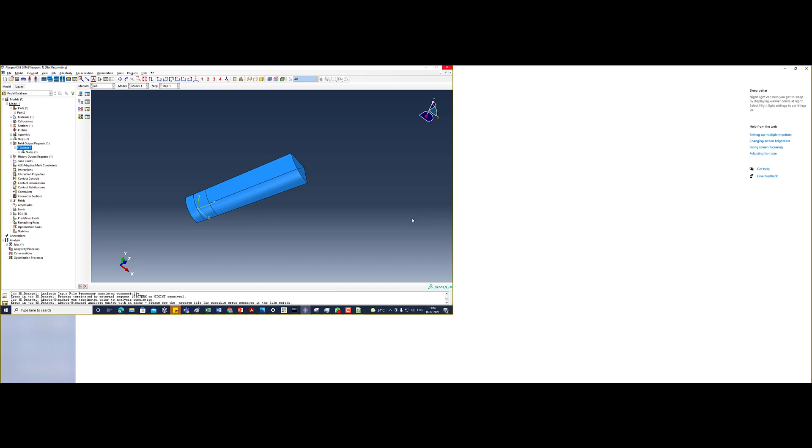So did you guys understand anything on the boundary condition part and partitioning? So you should practice all those things. And so this pre-processing part, modeling part is done. Now you have to apply some brain on the post-processing part also.

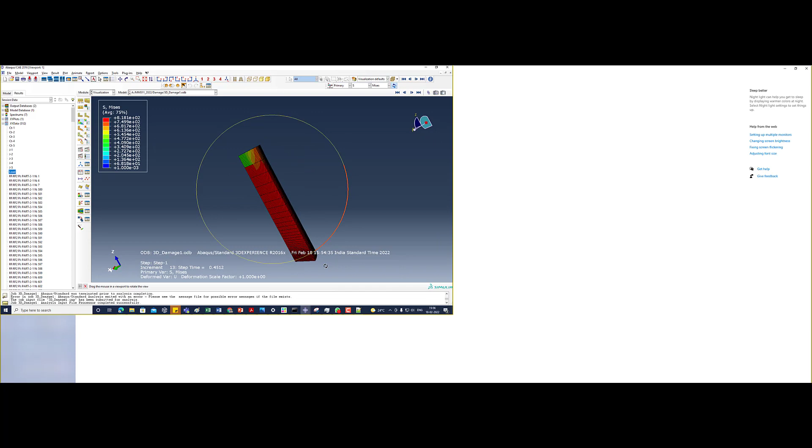Okay, let us see where the voids come up. If the voids are coming up above, I selected the void parameters also. Why those are not here? Did I not select the void? I did, no? So where is my input file? Is there?

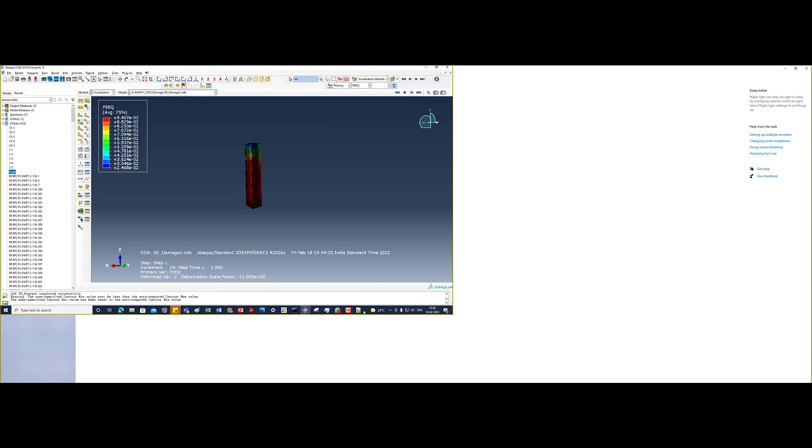So it is done, it's finished. Job is completed. 2 millimeter. Why it looks like this? Okay, so that is the center part. This is okay because this part is moving, that part is not. So that is the center part. So refinement is on the right position, but I do not see the void volume fraction. Probably our amount of displacement is too low. Is that the case?

So we have to see. So what we have to see is our failure strain was 0.3, fracture strain was 0.3. We need to decrease that so that the damage starts a little earlier. We need to start the damage a little bit earlier. So instead of 0.3, let us keep it 0.05 and 0.05. Okay, and now let us see what happens.

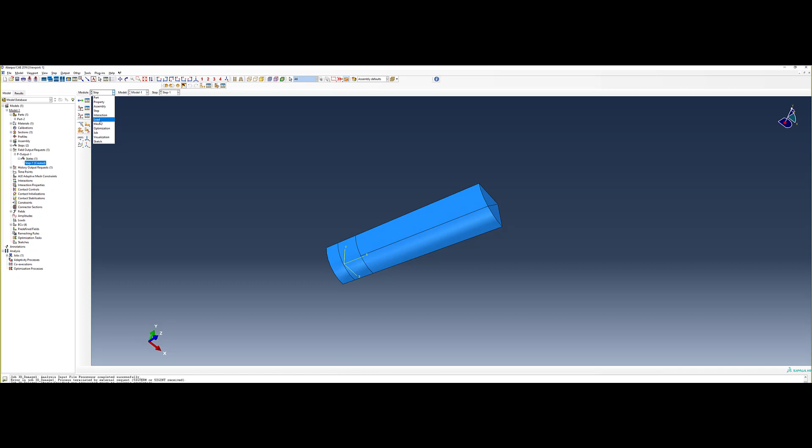So we have to go to mesh in the assembly module, but there also we can do something, because void will be coming up in the lower area only. So the two partitions which we have made, luckily we can choose those only, and there we can create full integration, and the rest of the places we can deal with reduced integration. So now let us see.

Also, there was no need of changing fracture strain. It was because of reduced integration. And now it will be damaging too early, I think. Yeah, so VVF is not available for material for element type C3D8 also. Why?

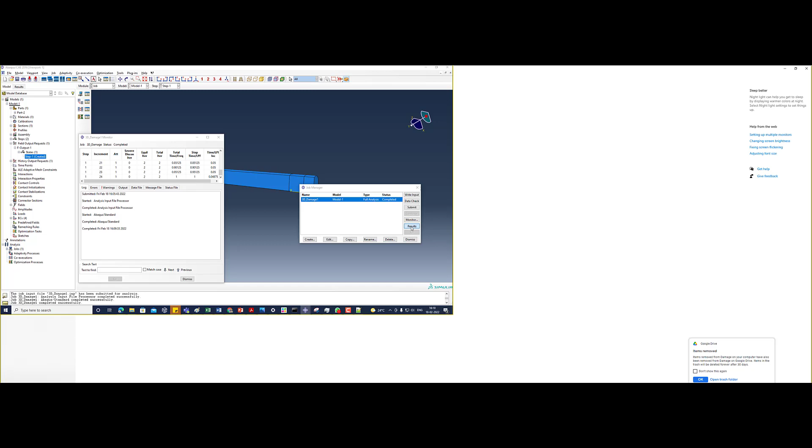Okay, so let us see if our sample shows anything. I don't think it is. No deletion of element, nothing at all. It is just getting elongated, stubborn sample. SDEG value zero, that means there is no damage. So we need to pull it further. So we'll try one more case, and then if it doesn't happen.

So there is no degradation. That means there is no damage, it's not coming up. It's not even starting. That means our criteria is too soft. Our damage is not even initiating. Why? Maybe our strain rate is too high.

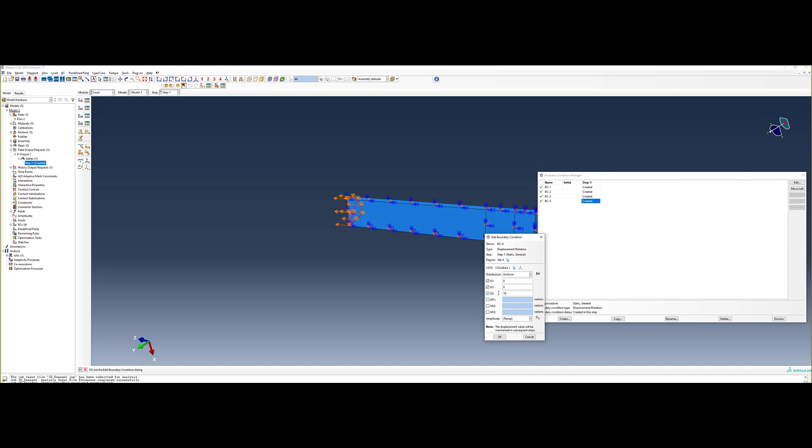Because I don't think fracture strain is too low. One thing could be our displacement is too low, but in metals 2 mm is good. So what if I make it independent of strain rate, then what happens? And also let me increase the displacement a little bit. Instead of going to 2 mm, go to 10 mm. Then you must break. And then job, submit. Okay.

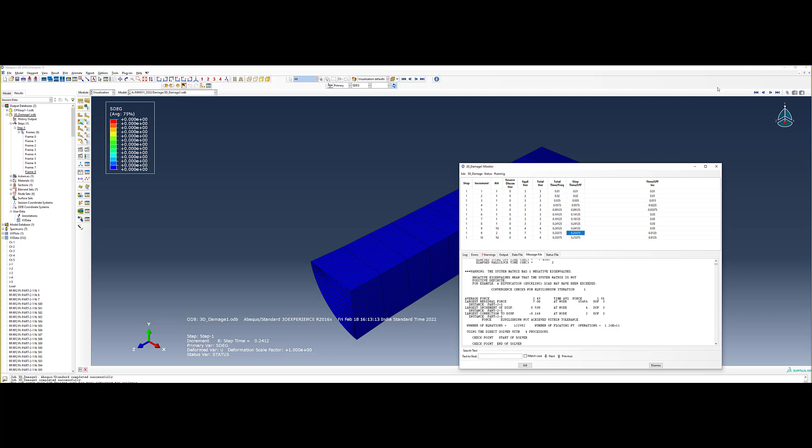So it will take some time. The time is 0.24125, which is where we are. But the calculation for 0.25375 is also done. So why are we not able to see that? We are there, but still no degradation is showing. So we have to see how much strain we have reached. So plastic strain is how much? It has reached 0.13. Our initiation was - how much was our initiation strain?

Initiation strain was 0.05, that is long back. This plastic strain, or equivalent plastic strain, is 0.13, so just double of what we had. Right. There must have been some degradation. Nothing, it shows nothing. This I don't understand why.

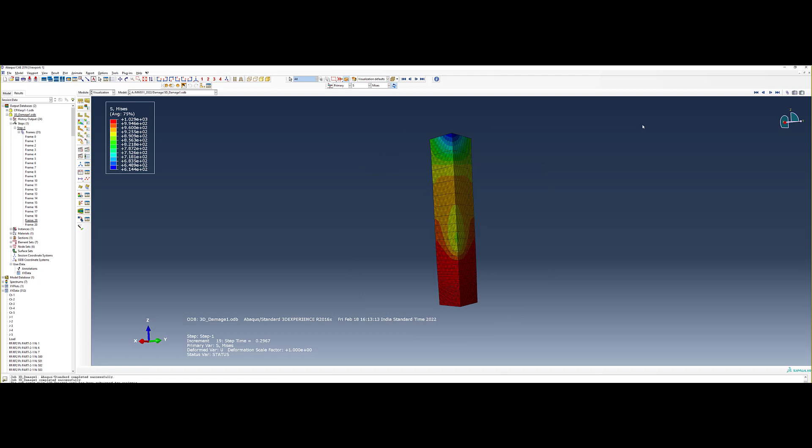The stress profile is okay now. There is still no value. I don't understand why.

Stiffness degradation should happen as soon as you have strain reaching that value. So plastic strain is also high here. How much is the plastic strain? Now it has gone to 0.3. We gave 0.05, 0.05, so 0.3 is too much already. Then why not? But it is necking now, you see, it is necking. So if I enhance this to a factor of 2.5, it will be clear to see that it is necking.

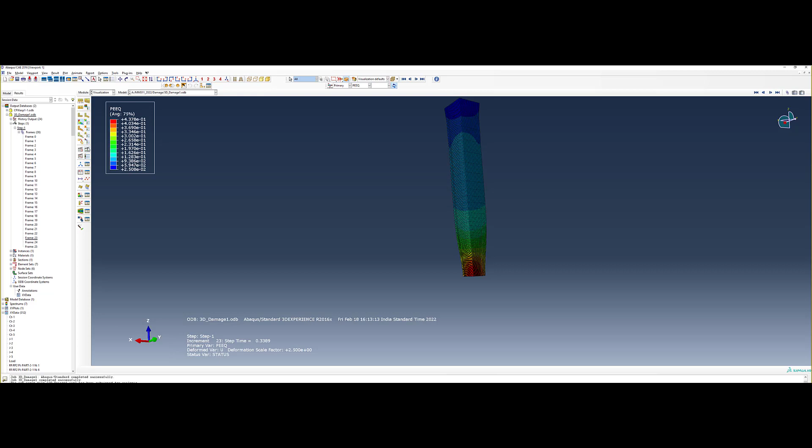Wait, I don't know why it is not showing stiffness degradation parameter. So why isn't the damage parameter value showing? In the calculation it is there, otherwise there will be no necking ever. SDEG, I think there is some problem with this. But the calculation is saying - so I'm sure the element will get deleted also at some point when we reach failure.

It will get deleted also. So you will see that elements will start deleting. I hope that will happen. But I don't know why that thing is not coming up. Status - SDEG is still 0. SDEG, if we could see, we could tell that if that reaches 0.9 it will fail, but it is not showing. I don't know why it is not showing.

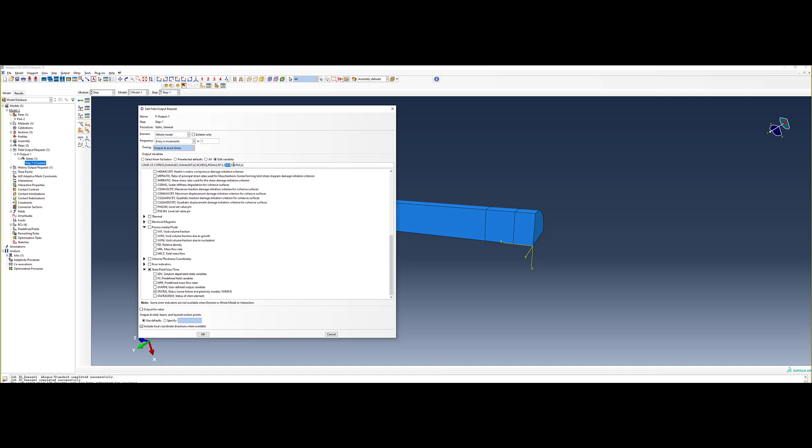So what happened to this? Its value is going higher. Now it is going beyond. So - still 0.

So let me - this is 2016, but while the job is running, I don't think I can open it anywhere else. So-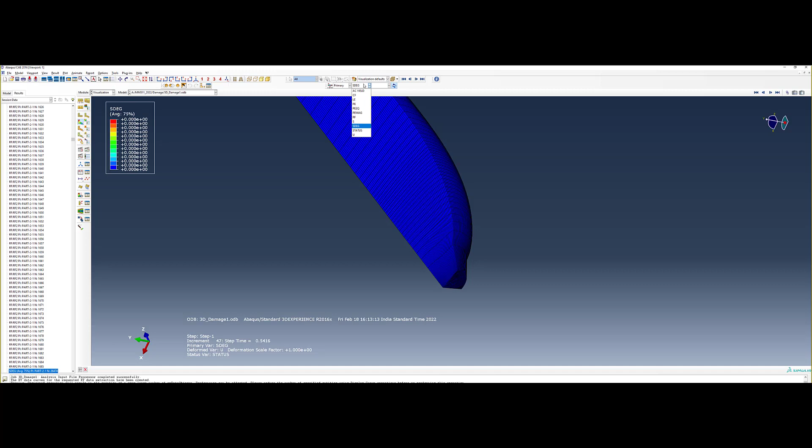90%. How much is the hydrostatic stress? So pressure is 700. The pressure is minus 798. The pressure is positive. The pressure value is positive and the triaxiality value is negative.

So we are not in that space yet. Pressure is positive, so minus P by Q will be a negative value. So we are not even in that space yet. So in stress triaxiality, you have to go to minus 200.

Yeah, but even then it could be minus 700, no? So let's make it minus 5000. But the ratio won't be that much. 700, 800 divided by whatever the Mises value is, it cannot go to that value, but it will go negative.

So 200 is okay. Maybe this space is the plastic effect of equivalent plastic strain rate. So let us see how much is that.

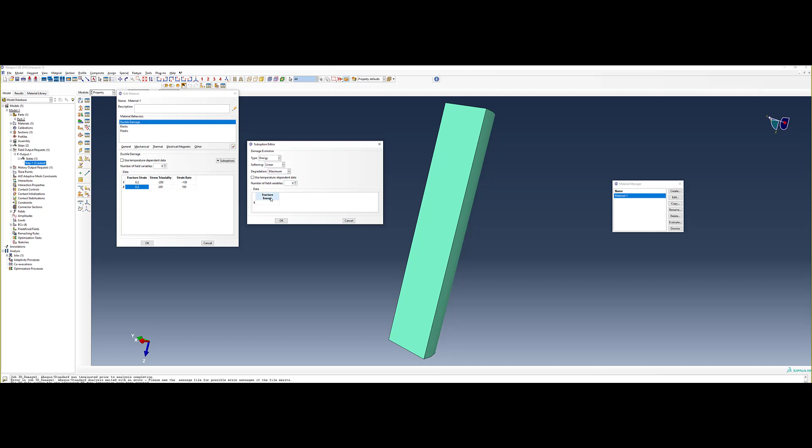And fracture strain, I believe it's too small, so we have to make it 0.2, 0.2, and we have to give, yeah, so this I forgot. So for displacement, we have to give some fracture energy. Evolution we didn't give, so there was no evolution, so that was the problem. So linear is okay, fracture energy I'll give. For metallic materials it should be how much? 50 is okay.

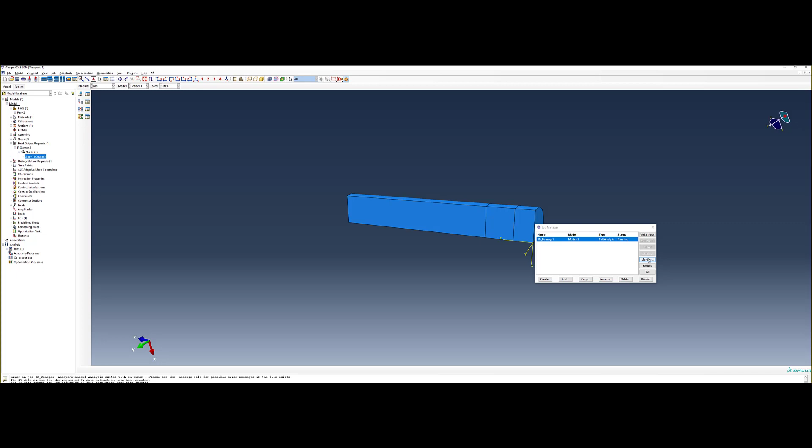So fracture energy is actually Griffith's energy, and damage initiation, damage evolution, and fracture criteria is given. Now it should work. So I'm now considering that the damage was just initiated, but it was not evolving because the evolution part was not made clear to the model. So I hope now it should work, but then something else also can be forgotten.

Yatin, are you there? Okay. So a few ways are there. Okay, so let us leave it for 5 minutes and see what happens. Take it.

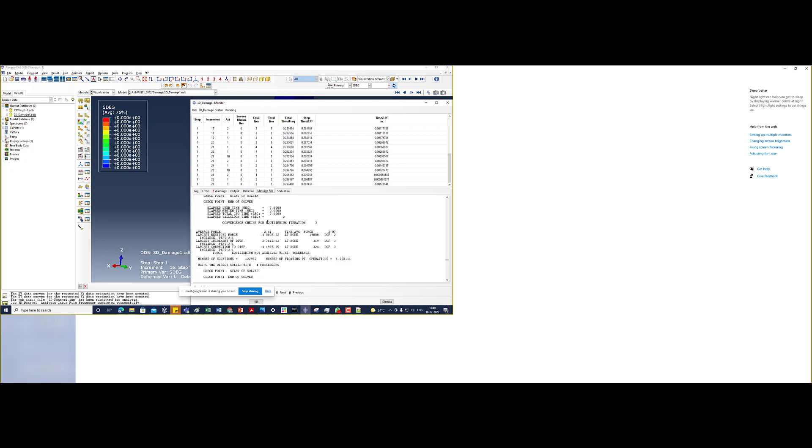Screen is not visible. Why? Is it visible now? Hello? Is it visible now? Oh, the internet is gone. Good, good.

Can you hear me? Can you hear me? Yeah, the institute internet connection was gone. Still we have not proceeded much in time.

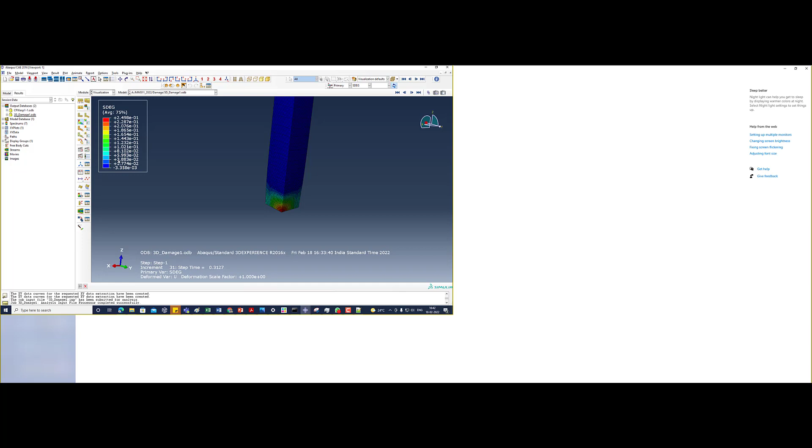And now you see the damage variable value is here. Can you see the screen? This is the damage parameter which started from a very small value, and the maximum value is at the center, which is still 0.25. So this will go to 0.9, then the element will get deleted. Okay, so this is where it started from.

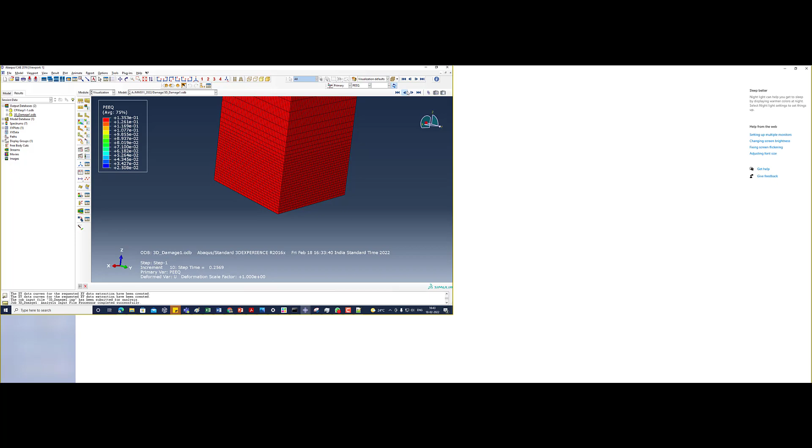So in this frame you see there is 0 value, and then now you see some value, right? And the red one will be somewhere, but the yellow one is 0.01. So our starting point is how much, 0.05, no? If you look at equivalent plastic strain, that has a value of 0.2. So just before this, still there. So damage must have initiated when the value was 0.05, at this point of time.

And after, tell me. Yeah, that happens. Sometimes that happens. So that is already clear, no? So when you go for washroom, you write it in the chat box. No, it's okay, nothing to be sorry.

So now you see the damage is coming up. It has gone to 68.7% here, and an element has been deleted. Do you see? One element is gone. Can you see this?

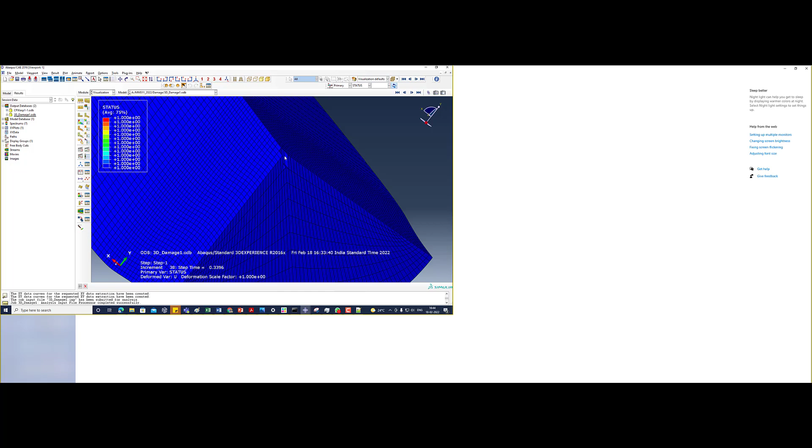One element is gone, and if it proceeds further, so that element is, and if that element remains there, like now, so 2 elements are deleted. So if you look at status, it will be 1, and as soon as I go there, these 2 elements must have the status value of 0, but you cannot see them because they are deleted. Because we exercised that option, if you remember, element deletion, yes.

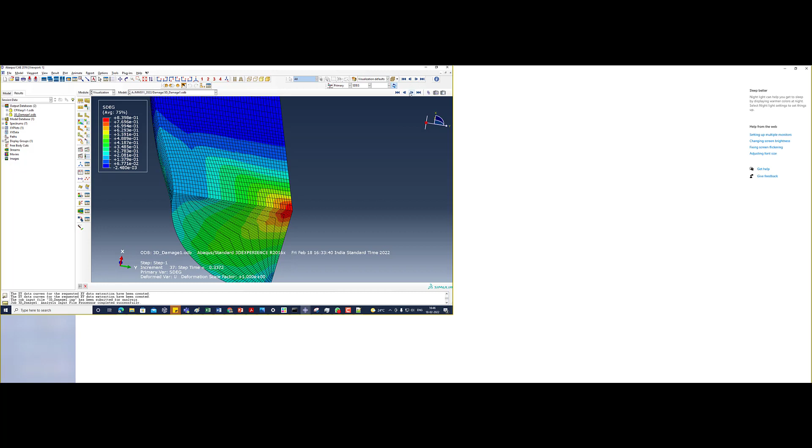So this is simulating necking as well as fracture, right? So everything works good. If so, we should not keep elements like this. We should keep proper meshing instead of this curvature. And also, the fracture in a real specimen will not be happening like this. You will never see a metallic material which is ductile which will have a hole like this at the center.

So here we are mesh dependent in our solution, because at least it can delete one element, it cannot delete half an element, right? So that shape factor will come in. If the element is of hexahedron shape, it will create a hole of that shape only. So in order to make it as accurate as possible, you have to make very fine mesh. Only then you will be able to simulate the ductile fracture phenomena.

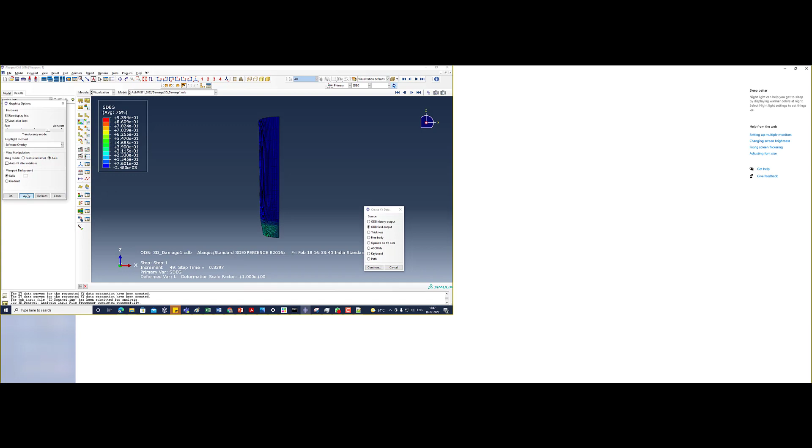And if you plot now the stress strain diagram for this model, the engineering stress strain diagram will be decreasing, because you are able to simulate the necking as well as fracture. So if you look at it like this, then you see that necking is also happening and fracture is also, the stress strain diagram will be going down. Okay.